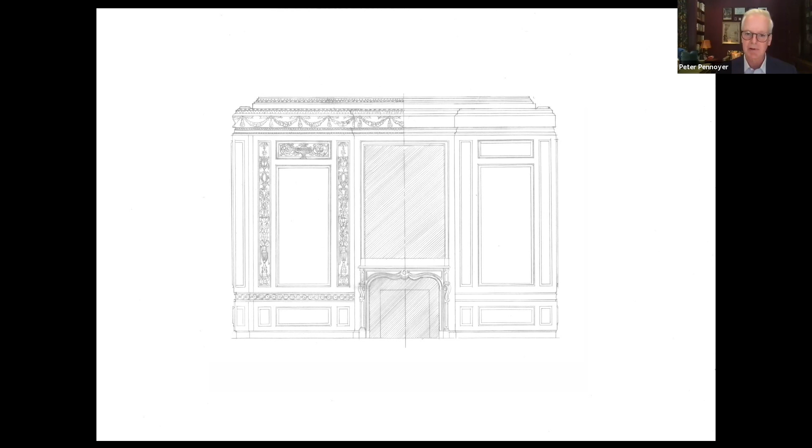These are examples of our drawings. These happen to be done by a wonderful architect named Anton Gleichen. And we go on to the next one.

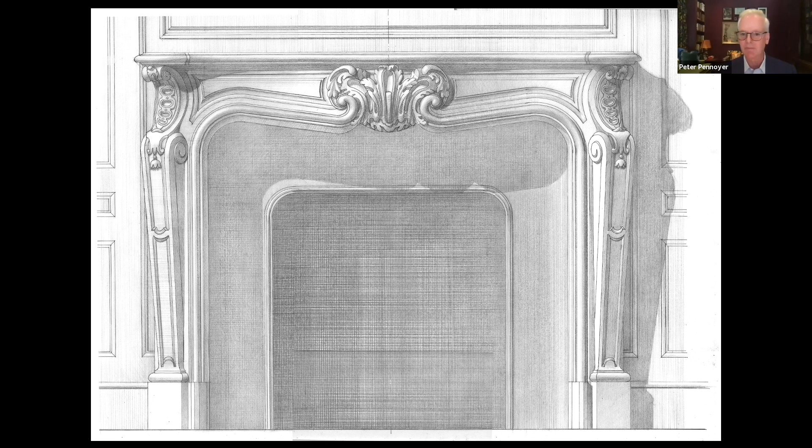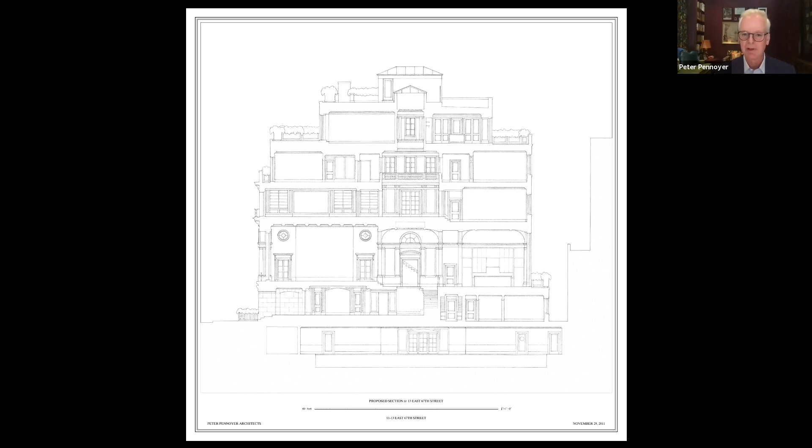So here is an example of a drawing that I still feel probably couldn't be done as well in the virtual world - Phil and Colin may disagree with me - but this is a mantelpiece in a new house that we designed recently. An example of a section through a townhouse, which is a hand drawing that's then mounted and formatted so it becomes part of a digital presentation, but it's a hand drawing, and it's a huge drawing - 42 inches tall, with great detail, just terrific detail with pen and ink.

So I want to thank Colin and Phil, who are wonderful team members of our office. And also I want to say, and you'll see a slide at the end, that all of these projects involve many other people in our firm, and we added a slide that lists them all.

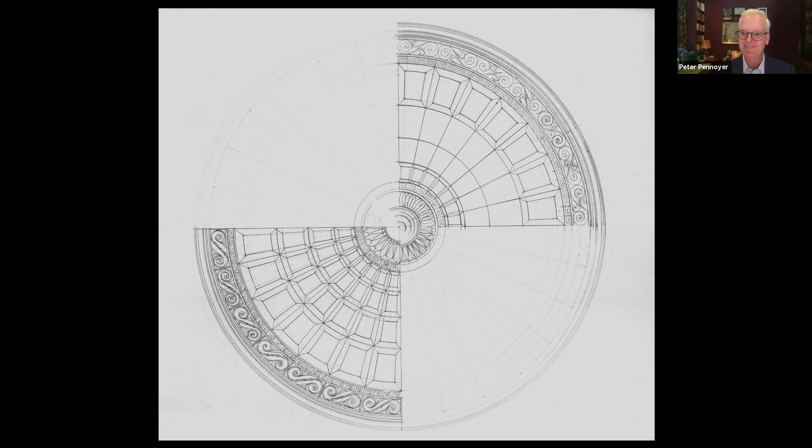Take it away. Okay, so at PPA, we have 2 primary workflows. One is based in CAD and the other in BIM. We decide which one to use for each project depending on that project's specific needs and which team members are available to work on that project at the time. If we're working in CAD, the project teams will develop a full set of 2-dimensional drawings which serve as the foundational documents for that project.

Any 3D models or other supplementary materials needed for the project are developed in parallel using those 2D drawings as a reference. If the design changes at any point after those 3D models are already underway, those changes have to be manually coordinated between the 2D and 3D teams.

Likewise, any changes made directly to the 3D models while it's under review have to be communicated back to the CAD team. Typically, once a project receives final design approval from the client, it proceeds in 2D only from that point forward.

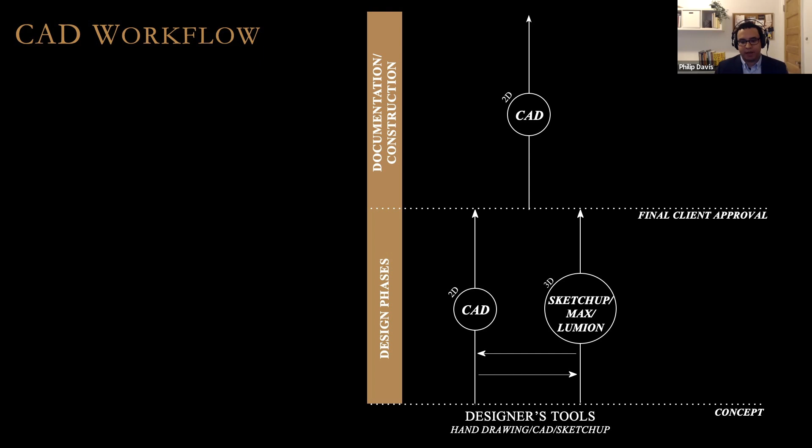The art selection here had the potential to really meaningfully impact the design, as different pieces want to be shown against different materials, and some of the pieces had structural or size and clearance requirements in order to be moved or displayed properly. So because of that, we identified this space as a good candidate for digital rendering.

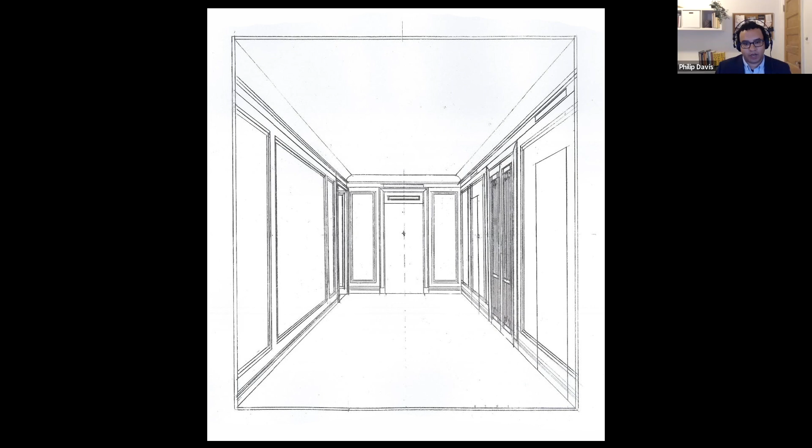That would allow us to create presentation materials that included the art and could be understood immediately, which would help the client explore options and make informed decisions.

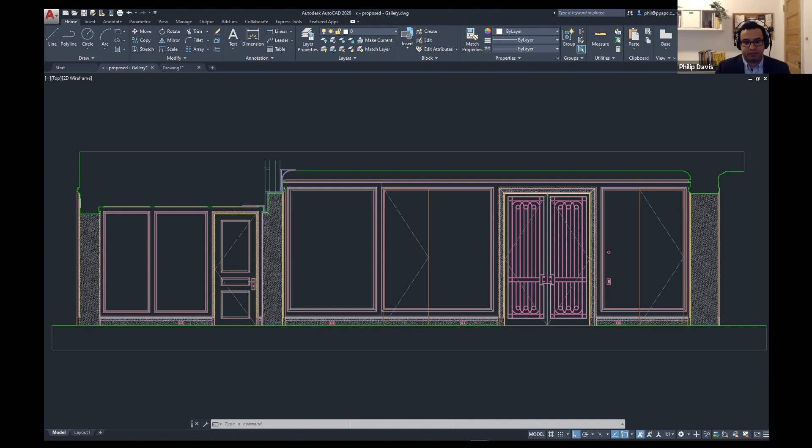So working from the designer's sketches, the project team produced a set of 2D CAD drawings like this interior elevation. These drawings served as the primary documentation of the project. They were used to create presentation drawings, construction documents, and they were also handed over to the 3D modeling team and used to create a 3D digital model of the space.

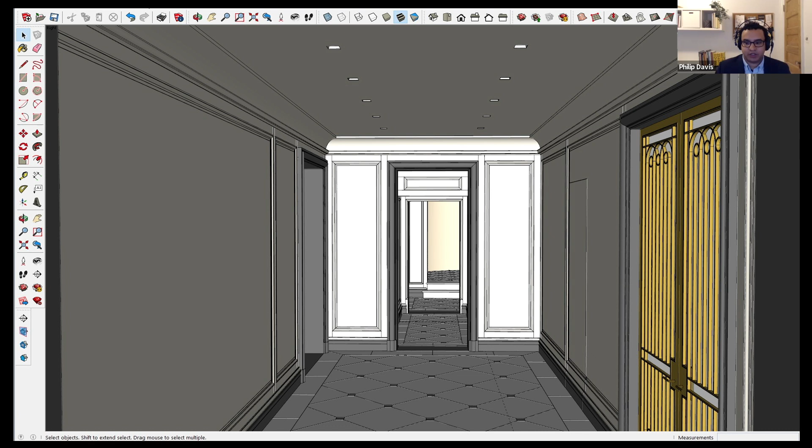However, you will notice that the stair at the end of the axis is missing entirely, and that's because it was built in a separate piece of software called Rhino 3D. Rhino is much better at dealing with geometry that has complex curvature, so the repeating pattern in a handrail that follows an elliptical spiral stair was a much better fit for Rhino's strengths than SketchUp.

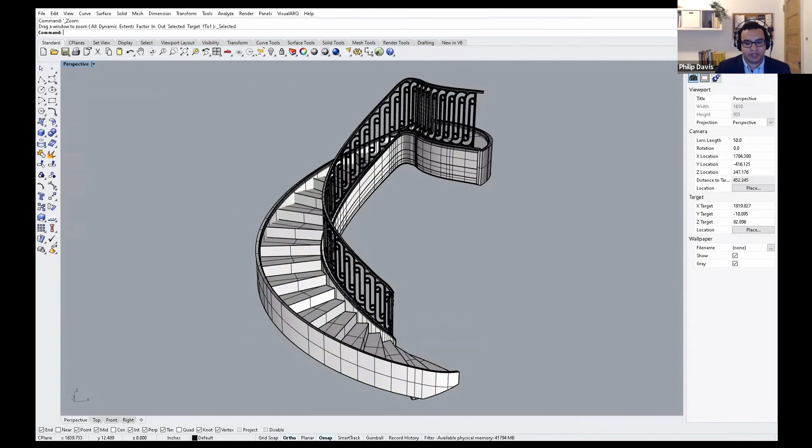We then move into a piece of software called 3D Studio Max, where we bring together and merge the geometry coming from SketchUp and Rhino. We then introduce lighting information and apply textures and materials to the surfaces of the model. And crucially, this is also where we start to incorporate the art into the space.

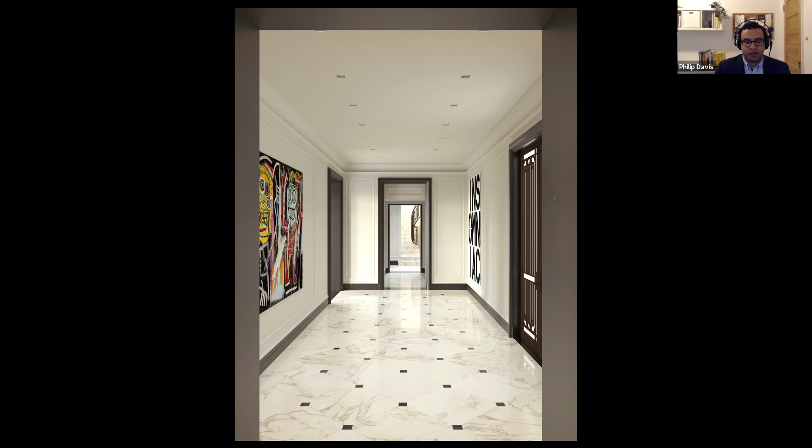And using this software, we're able to produce digital renderings like this one that we present to the client. And these images help the client decide which pieces of art to display where and choose the materials that will help the art look its best.

And those are the kinds of decisions that, if you leave them unmade, have the potential to really introduce a lot of delay into a project. And that's especially true if the client makes a decision, but then loses confidence later on in the project and wants to go back and make changes to things.

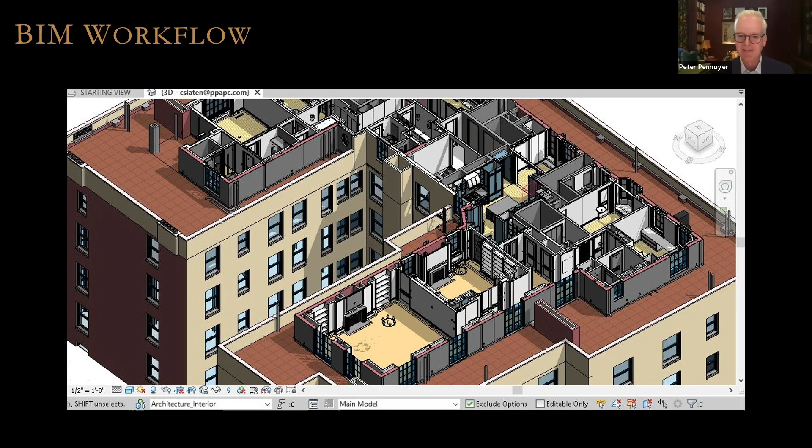Thanks, Phil. The second and most recent workflow adopted by PPA is the BIM workflow. You could teach an entire semester on BIM and how to use the various BIM tools, so I'm simply going to give a few bullet points for those who aren't familiar.

BIM stands for Building Information Modeling. One of the most widely adopted software for BIM is Autodesk Revit, which is often referred to interchangeably with BIM. Instead of creating 2D line drawings like you would with CAD, with BIM, you are building a 3D model of the building as if you were constructing it in real life.

This 3D model serves as the basis for all of your documentation. Drawings like floor plans and elevations become views of a single model. This means that as changes are made, all of the drawings or views are automatically updated simultaneously.

In the background, a BIM model is essentially a visualized database. All the elements within the model carry information, and this information can be organized into schedules that are also automatically updated as the project progresses and can even be used to manipulate the geometry.

Because one file is the source of all the information, Revit has the capability for multiple team members to be working on the same model at the same time. In some cases, these teams can get quite large.

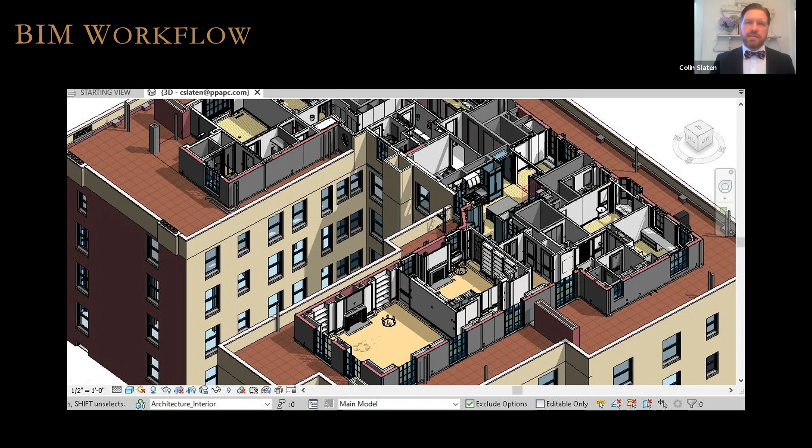Additionally, BIM also provides the added benefit of being able to coordinate three-dimensionally with consultants and run various analyses like lighting or energy, among many other things.

Here on the left, we're demonstrating a successful route for a chimney flue from the fireplace to the chimney through structural, mechanical, and architectural obstacles. On the right is a live coordination view of a reflected ceiling plan. We use these as a quick visual check to see if ductwork is poking through the ceiling. The bright green ducts clue us into areas that require more attention.

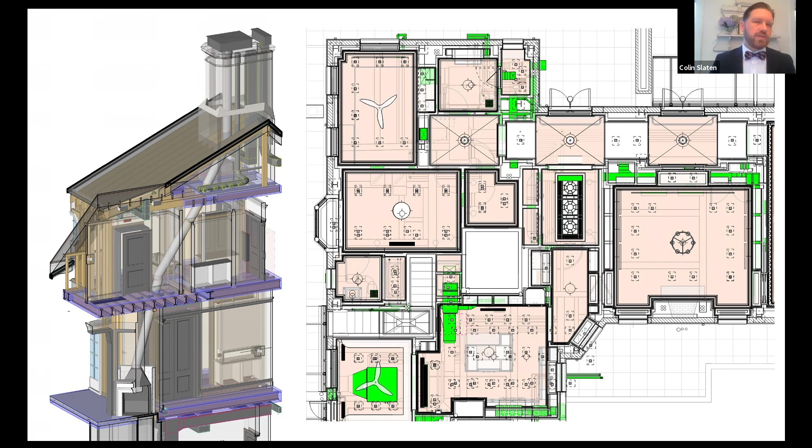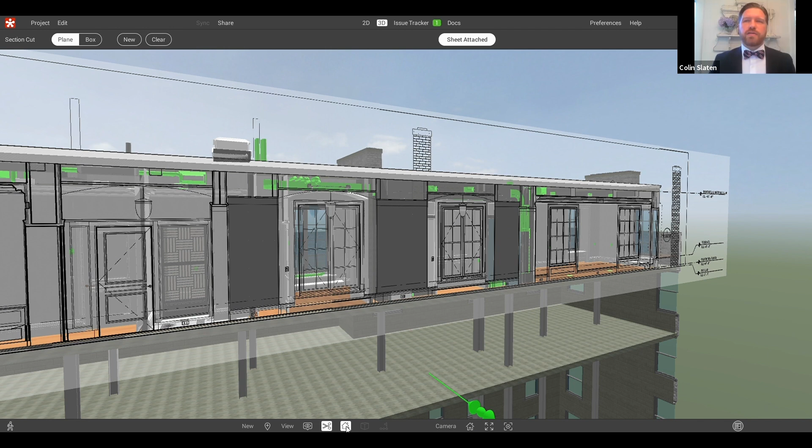Recently, we've introduced an additional program called Revizto, which allows project team members as well as non-Revit users to see the latest drawings and models auto-updated daily from the live Revit model. This allows for easy review of architectural as well as consultant models and has a robust issue tracking system for communicating and task listing. The 2D drawings can be overlaid on the 3D model for quick contextual reference.

So why BIM? Among all the reasons I previously mentioned, one of the more interesting and important ones to PPA is the convergence of 2D and 3D efforts that you saw in the CAD workflow. Because the BIM model is the source for all the drawings and 3D information, when we go to render for a client presentation, all we need to do is export the model. There may be some cleanup, but that work usually turns out to be necessary regardless.

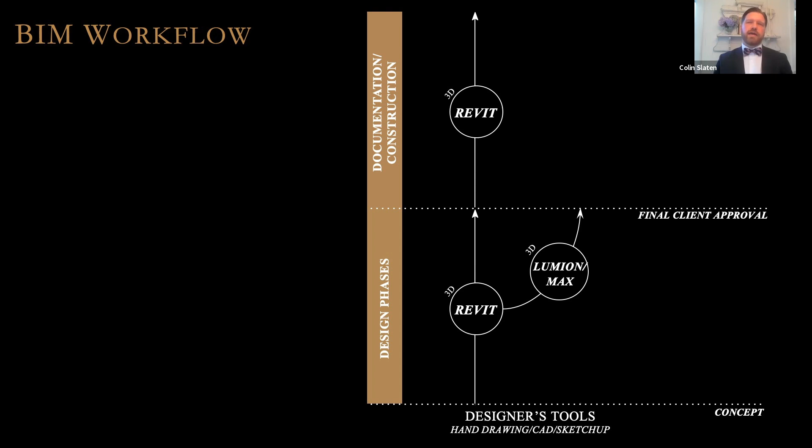Where previously two teams had to keep things coordinated and up to date between the CAD drawings and a separate 3D model, now all of this happens automatically, significantly reducing redundancy. You can see in the diagram how the BIM model starts at concept and carries on through the life of the project, while other ancillary efforts like client presentation and construction documentation branch off of it.

A lot of what PPA does is related to renovation projects. So as an example of BIM, I'm going to start at the very beginning with a survey model. In recent years, we have been hiring surveyors to provide point cloud scans and then create Revit models of the existing conditions for us.

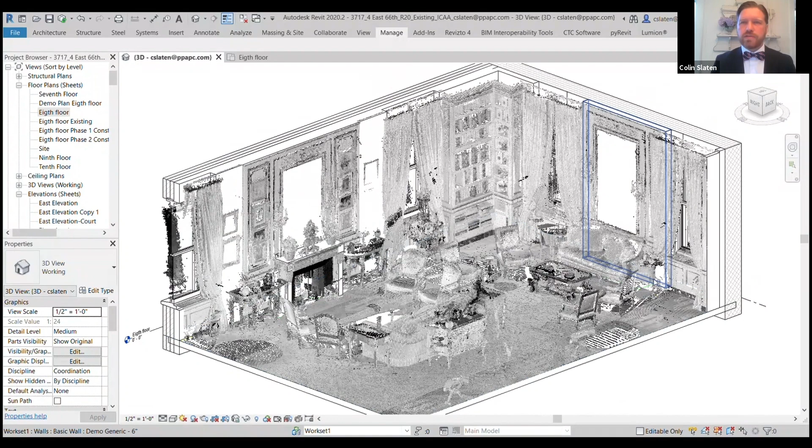So Colin, could I just ask, so just to be clear, this is an image made of dots, which are all the data points. It almost looks like a photograph, but it's a collection of data points from the laser. Is that right? Correct, and it's a three-dimensional image.

So the scanner basically scans the entire room and reports back points when it hits solid surfaces, and that's where you get the point cloud from. It's just a bunch of points. It takes multiple scans in different rooms in order to achieve a full picture of the space.

The surveyor will create a Revit model based on that point cloud information as part of their deliverable. Beyond that, we can actually overlay this point cloud onto our architectural Revit model to verify things against the existing conditions. In the case of this scan, we were under time constraints to get the survey model started, and the previous tenant hadn't moved out yet.

As you can see, the scan captures everything. Ideally, we would start with an empty apartment, but the surveyor was able to construct the model from it. You can see the blue highlighted object there is a window that's part of the actual Revit model.

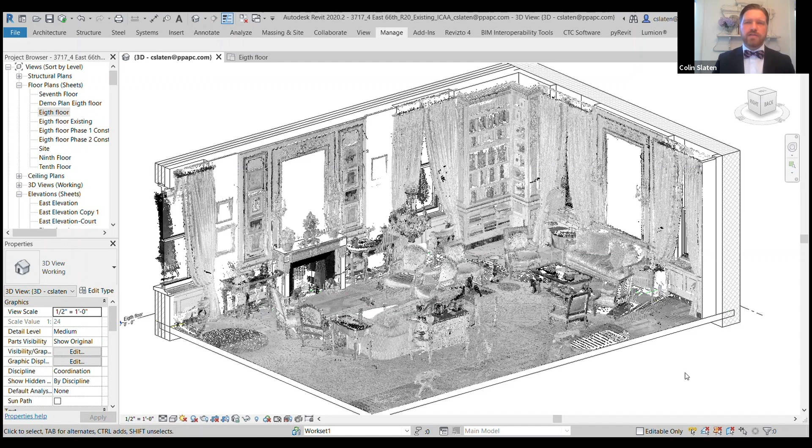In the case of an existing apartment renovation, the team will take the model provided by the surveyor and begin virtually demolishing the interiors based on the design. Because Revit allows for phasing of projects, we can document the demolition directly in the model.

The team is then able to use the surveyor's model and the point cloud to verify important dimensions and feed that information to the designer. Seen here, PPA designer Ryan Hughes created hand drawings of what will eventually be the new library.

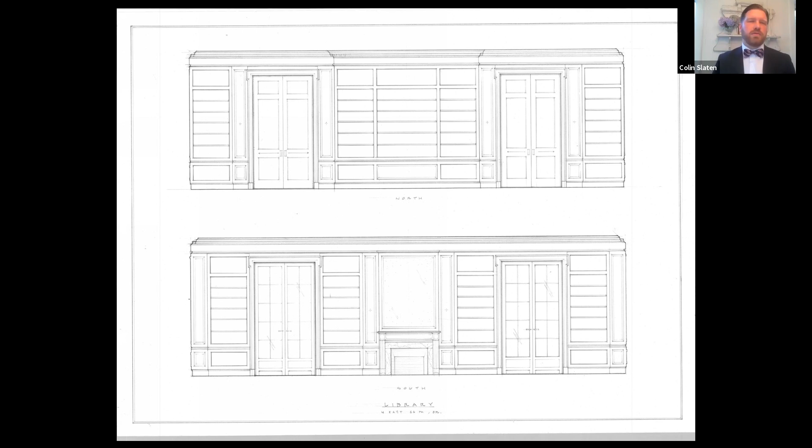Though it's still an ongoing effort at PPA, we are continually trying to find ways to streamline the process of integrating the basic details of a typical classical room into our Revit workflow. We begin with generic models of things like casings, mantles, and window jambs, and try to set up a workflow that allows team members to easily customize these elements to the individual project. This gets us about 85% of the way there, with an additional 15% being set aside for specialty modeling to capture less typical conditions.

In the video, you can see the team has begun using these elements to create a model based on the hand sketches seen in the previous slide. The library is now a fully worked out 3D space.

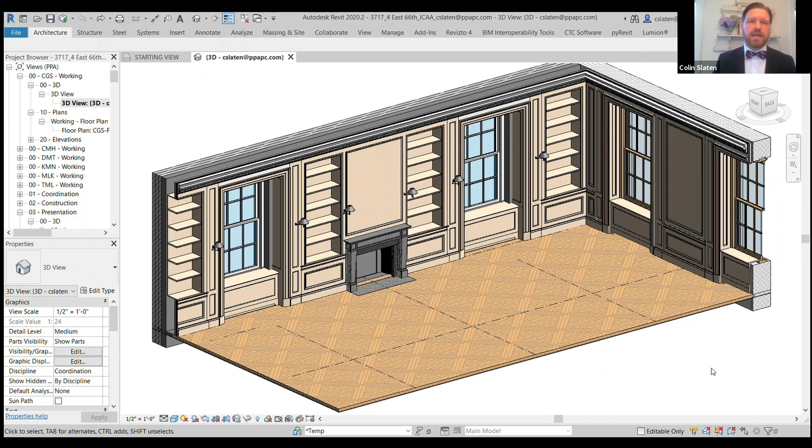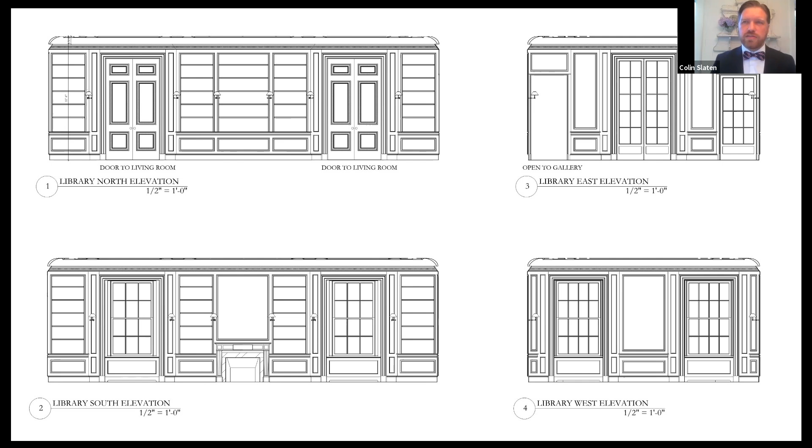And from the same model, the interior elevations. Annotation and dimension will eventually be added to these to create the elevations used for the construction documents. This particular project is on the boards and about to go into the construction document phase. Lastly, a perspective line drawing derived from the same model for use in a client presentation.

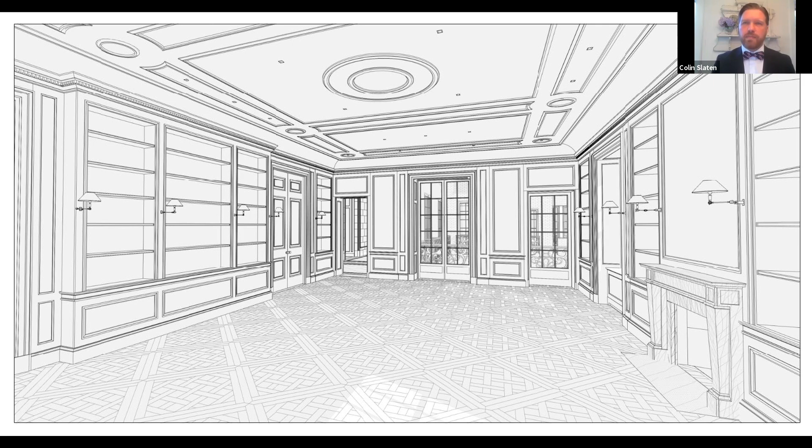In some cases, we choose not to render at all. Instead, we use line drawings like this that are views of a live Revit model. Because all these drawings are simply views of the same model, as detail is added to the model or changes are made to the design, these are all updated automatically. This allows the team to make changes for an upcoming presentation or deadline rapidly.

We sometimes take these early renderings a step further and use a white box render method to demonstrate the feel of the design geometry without getting into the weeds with making definitive material decisions. Lumion is the tool of choice for this, as it can rapidly create quality renders with a very small time commitment and no need for post-processing.

On another project, starting from one of Gregory Gilmartin's hand sketches of an Art Deco corner detail, the project team is given a series of sketch vignettes to measure and develop in Revit. In this case, because this detail repeats in various forms throughout the building, we decided to make this a family that can be placed in multiple locations.

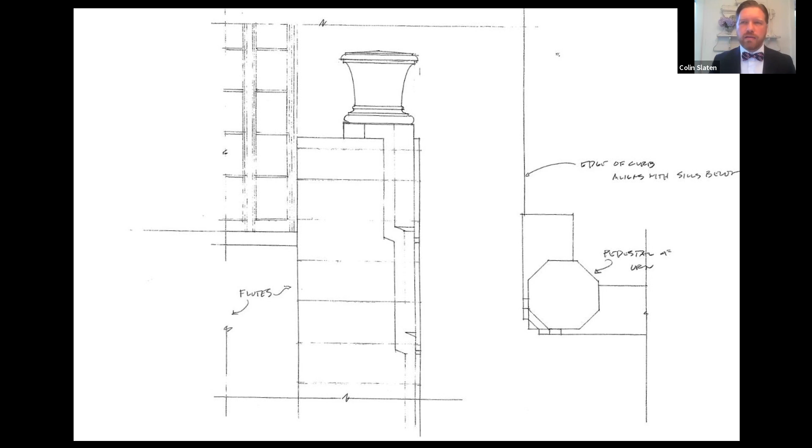A family in Revit is roughly equivalent to a CAD block. The design consists of a corner pedestal with a series of drip edge chamfers, and on top of the pedestal sits an ornament. In order to make this flexible enough to use in multiple locations, parameters were added that allowed team members to essentially pull the chamfer down the side of the building to different levels depending on where it is located.

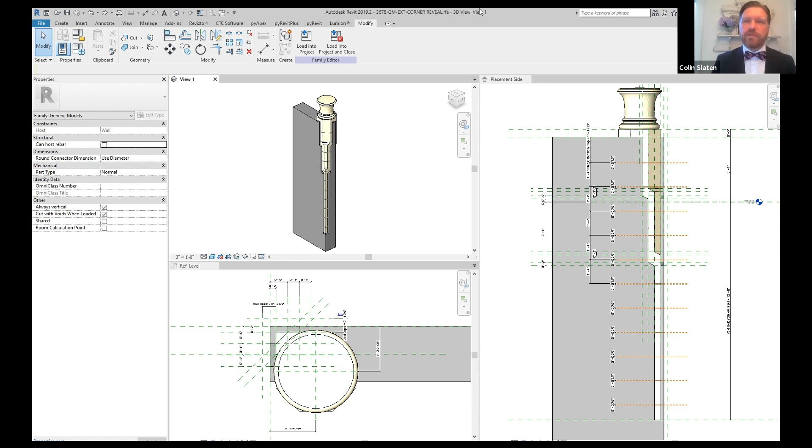And Colin, will this allow the stone production people to mill for using this as a background? How do they integrate that? This would be, they would go off of the construction documents, kind of the traditional way. However, we have the full capability of providing them the model in order to do that. I think in this case it didn't happen, but it is absolutely possible.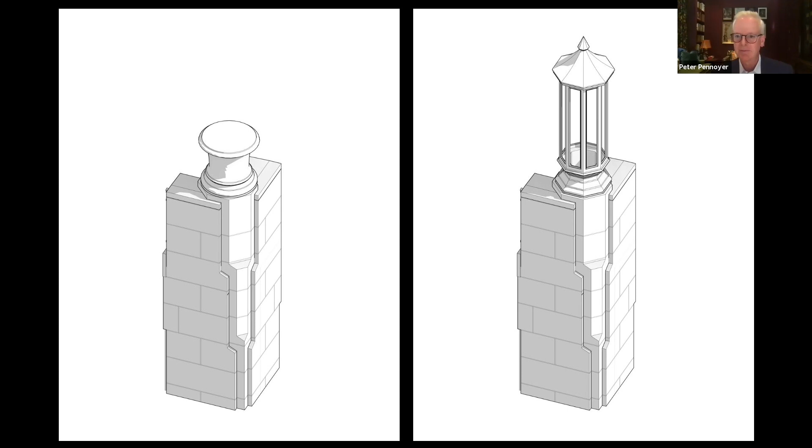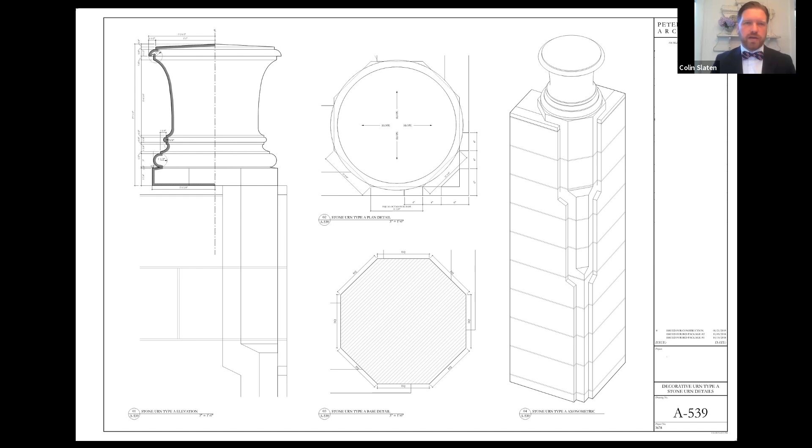And just one more note to give people a sense of scale, the lantern you're looking at there is 78 inches tall. That's true. And another thing we built into this family is the ability to swap out the details, so you have the urn on the left and the lantern on the right just by selecting them out of a list. These two images were taken directly off of the Revit model, and then again the same model was used to create this documentation page, which is what we were talking about a minute ago. This would go to the fabricator in this case.

We also have begun to use Revit to help us organize large estate projects that consist of multiple buildings. This allows us to study different layouts, do sun studies, and organize models. Even if they aren't all native Revit models, they can all be brought into the site and studied together, even if it was coming from SketchUp or another tool.

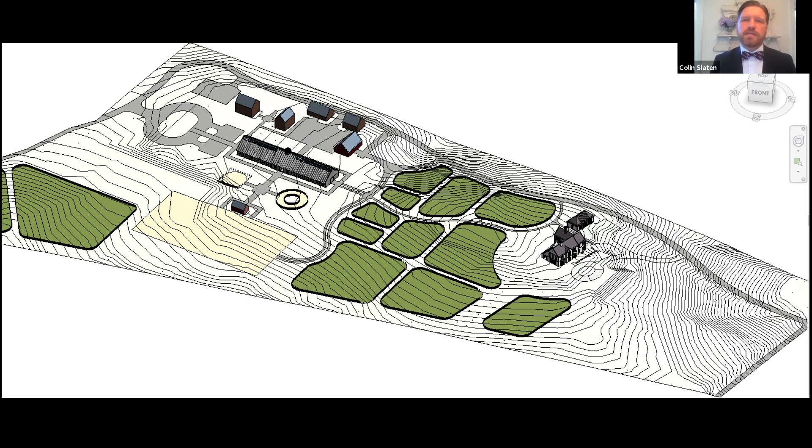This is a horse farm in Kentucky that is currently on the boards. We can then export the entire site into Lumion. We've been developing this hand sketch effect application in Lumion to render exterior projects. Lumion does a really great job of creating realistic looking artistic effects that do not need to be post-processed. It also has a very robust library of plants and trees for convincing exterior renders, which is why it is also widely used by landscape architects.

Once the design and modeling work has been completed, this whole process of creating these renders didn't take more than 20 minutes. So those techniques are sufficient for most situations, but we occasionally find ourselves in need of something a little more specialized. For instance, 3D printing.

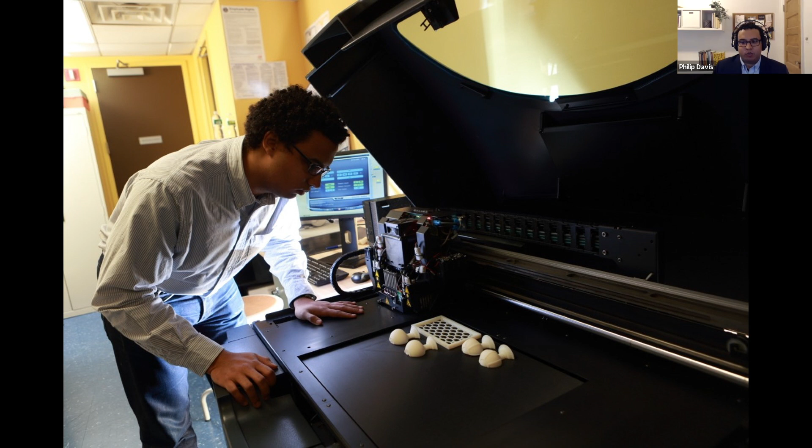We have a 3D printer located in our office. You can see it here being operated by a young man in an ill-fitting shirt. This machine uses polyjet technology, which allows for a much finer surface finish than most other 3D printers can achieve. It also has a very large build envelope, allowing us to print pieces up to 17 inches across in one go.

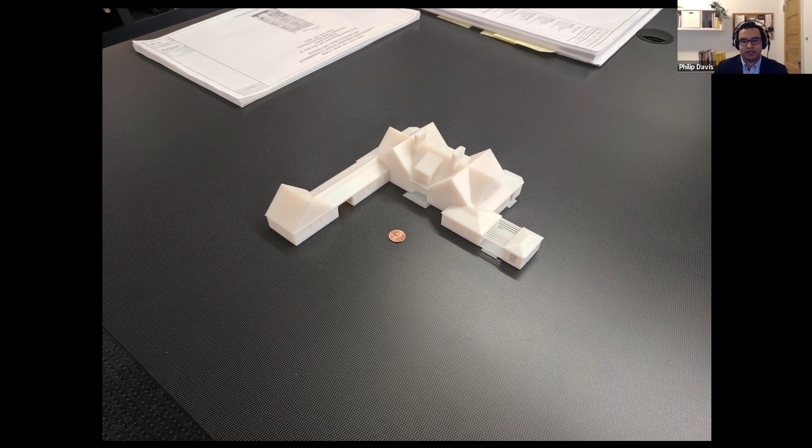Since we've started 3D printing, we've found that most of our models fall into one of three categories. First, there are the small massing models. These are typically produced at 16th inch scale and edited down to contain very little information beyond massing. The openings here are indicated by changes in plane, but nothing beyond that level of detail is communicated. The small size and simplicity of these models makes them very quick to produce and also very easy to iterate on. Building the first version takes time, but subsequent changes can be captured in 3D quickly and a new model printed.

That ease of iteration is one of the main benefits of 3D printing, because the work you did to produce your previous model isn't lost when you start on your next one. For some projects, we've been able to produce and present models like this one on a weekly basis. And just to be clear, that's the limit of the client's schedule, not the machine or our workflow. We could have gone faster than that if we needed to.

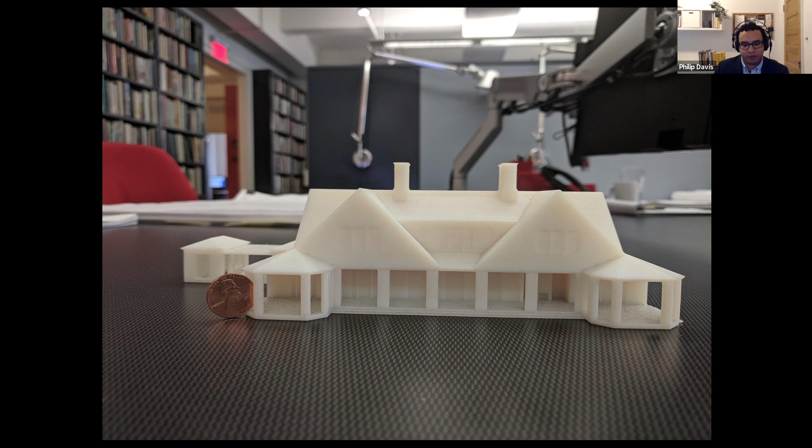On the left, you can see the profile that was handed off by the designer, but a key change has been introduced. Inside this rectangle, some little lines have been added that actually introduce a 1/100th of an inch gap between the knob itself and the rosette surrounding it. These profiles are then used to create a digital 3D model, shown on the right. Then those 3D models are sent to the printer and printed together as one print.

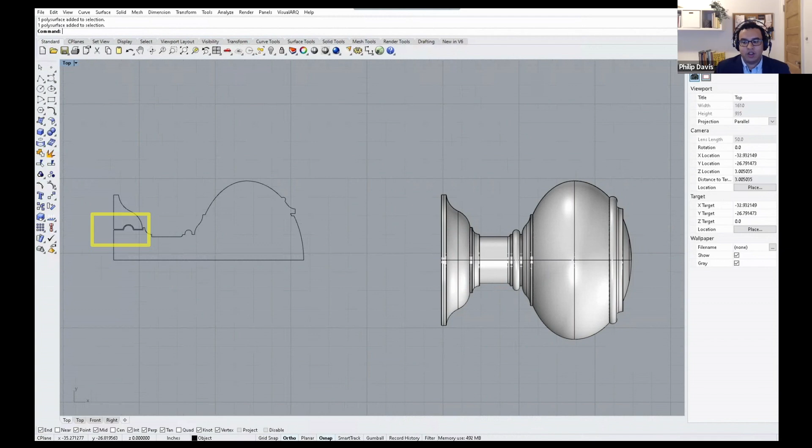After the cleaning process, that small gap we introduced between the knob and the rosette allows the knob to turn freely if you hold the rosette in your hand. As simple as it may sound, the ability to turn the knob in your hand when you're holding it really helps you evaluate the design.

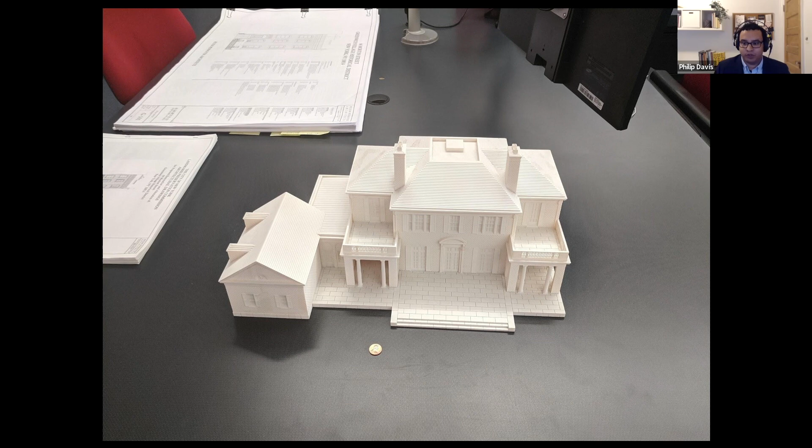We also produce large, highly detailed models for display. Here's a model of a house in Long Island that's on display in our office currently, and you can see from the penny that this is a quite large model. It had to be printed in multiple pieces and then assembled afterward to achieve this size. If you look closer, you can see it's also very information dense. There's a brick texture on the wall, the shutters have texture, all the molding profiles are included, even the downspouts are indicated. It really tells you a lot about the design of this home.

This model, which you might recognize, of a Czech cubist house in Ohio, falls into this display model category. So let's talk briefly about how a model like this might be made. SketchUp, we found, is extremely well suited for 3D printing work.

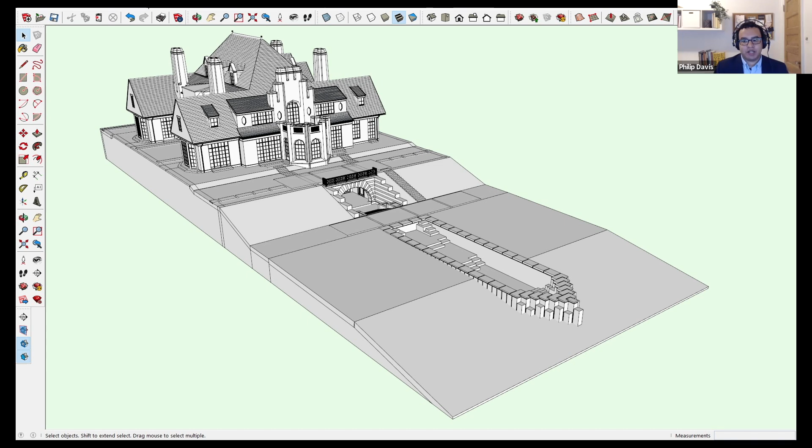This is the SketchUp model we used to produce the model you just saw. The most important thing to note is that this SketchUp model is purpose-built for 3D printing. We made other 3D models for other purposes for this project, but we can't use them interchangeably, because we had to introduce key changes for the benefit of a 3D printed physical model.

If you look closer at this facade, in the areas indicated, there are coplanar changes in material. Since we prefer a monochrome white finish in our display models, we had to indicate this material change in some other way. We did so by introducing grooves that run across the facade, and they had to be drawn 2 inches wide in order to read well at the size of the final model.

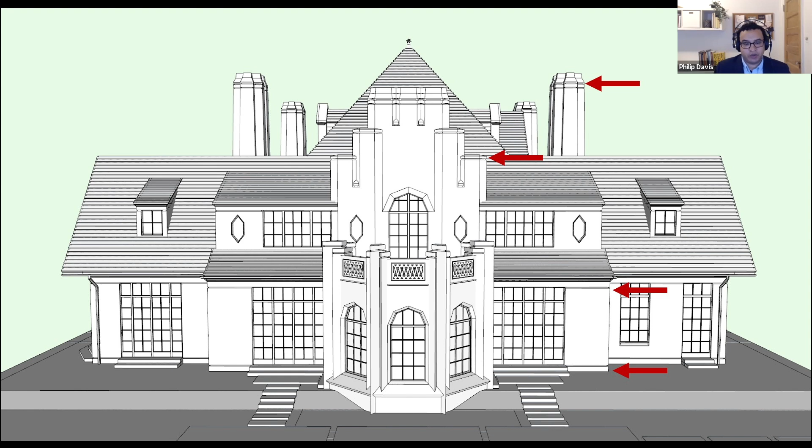Obviously these 2-inch grooves aren't present in the actual design of the real house, but they're necessary here to communicate the actual design intent. You can see those exaggerated details make the model legible at a distance. You can tell there's some articulation in the design at the tops of the chimneys as well as at the base of the house, even though it's all the same color.

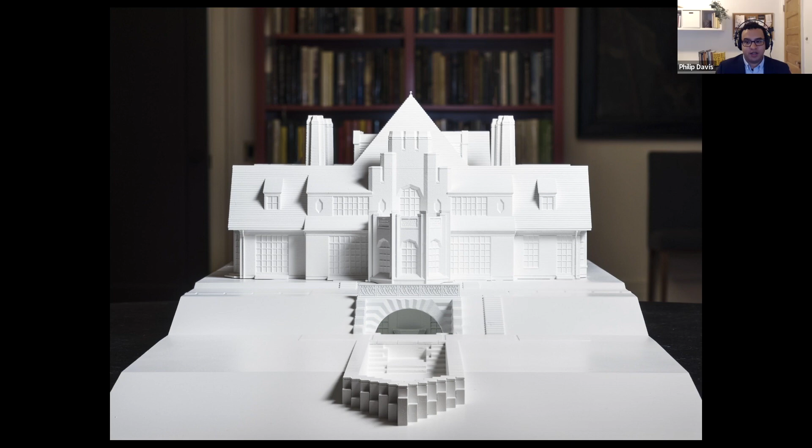We also use digital tools to help inform the designers for specific exercises. During the design of the Czech Cubist house we were just looking at, the main entry was focused on for this. The project team wanted to interpret a linear vertical color gradient over a 3D faceted volume into a 2D unfolded series of polygons, which is a mouthful.

A base model of the space was built in Rhino, then unfolded. You can see in the slide the 3D and unfolded 2D representation of the space. Grasshopper, a visual scripting plugin for Rhino, was used to apply the gradient to the shapes. In the window in the bottom right quadrant, you can see the multiple gradient options in the sliders and the scripts that create the gradients on the shapes.

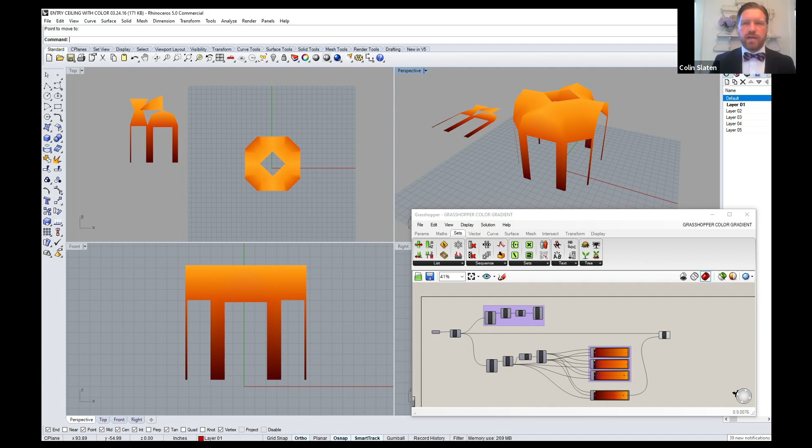The flattened gradient pieces were then printed and given to the designer, Anton Glicken. I also want to point out that this room was inspired by the great banking hall in the building 1 Wall Street, which is Ralph Walker's great Art Deco skyscraper. That banking hall was a work by the artist mosaicist Hildreth Meière.

So if some of you know New York architecture well, you'll recognize the style of this room, but applying it in a space this small was very challenging.

Thanks, Peter. And after the grasshopper script had been applied to those flat pieces, it was then given to the designer, who applied an artistic silver web pattern to it. You can see all the paper models and hand-painted web patterns applied here.

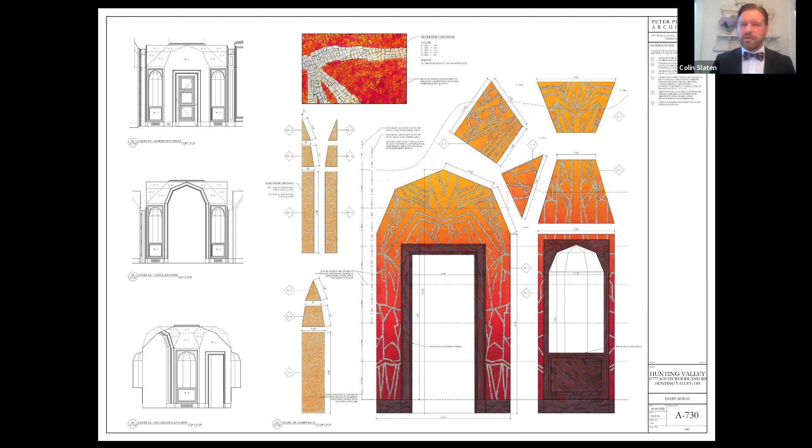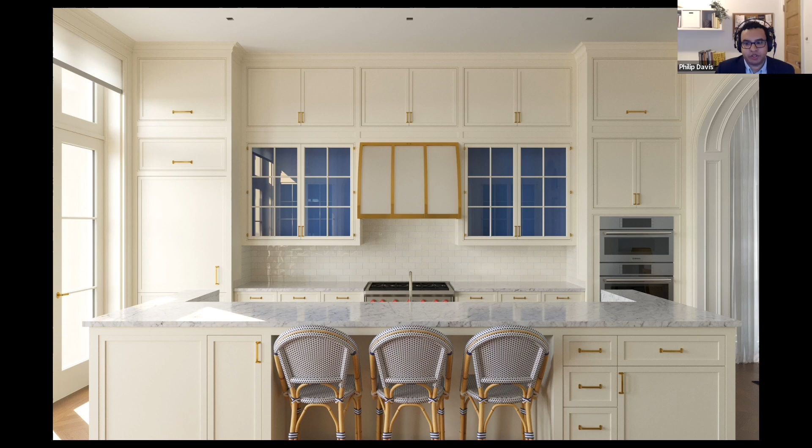We think that bouncing back and forth between the digital and analog is where you can really get some fantastic, intriguing moments. So if we can return to the topic of digital renderings, we find renderings like this one are very useful tools, but they definitely do have some drawbacks.

Namely, they don't leave very much to the imagination. They present small or incidental design details with as much fidelity as the core architectural ideas of the space. For instance, you might present this image intending to discuss the organizing logic of the kitchen storage, but end up spending the bulk of your time talking about how these particular stools are not to the client's taste.

We found that this really helps to convey a sense that decisions are still being made here, and that the thing we're presenting to the client is an idea about the kitchen. We're not dictating to them which stools they must sit in while they eat breakfast.

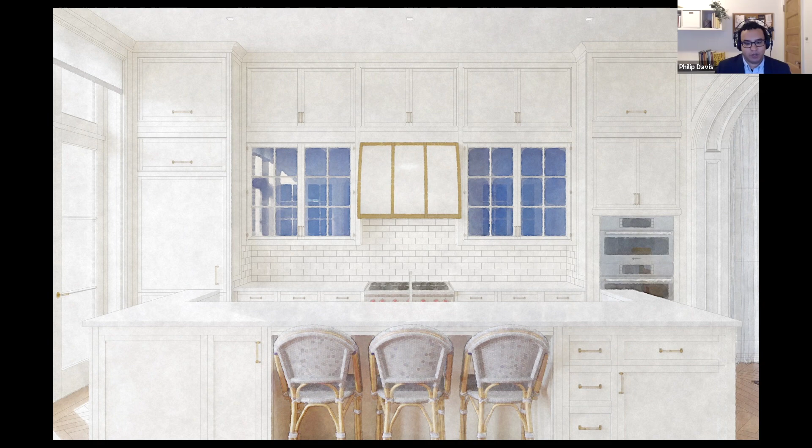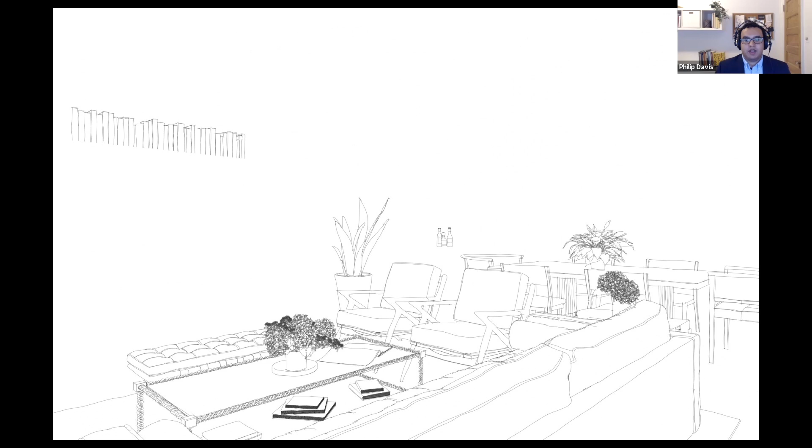So let's talk briefly about how an image like this is produced. It starts with a standard digital rendering. We then use a plugin to 3ds Max that's focused on producing line work to create a line rendering of the architecture that exactly matches the rendered view we've produced. We produce another line drawing that captures the furnishings in the space.

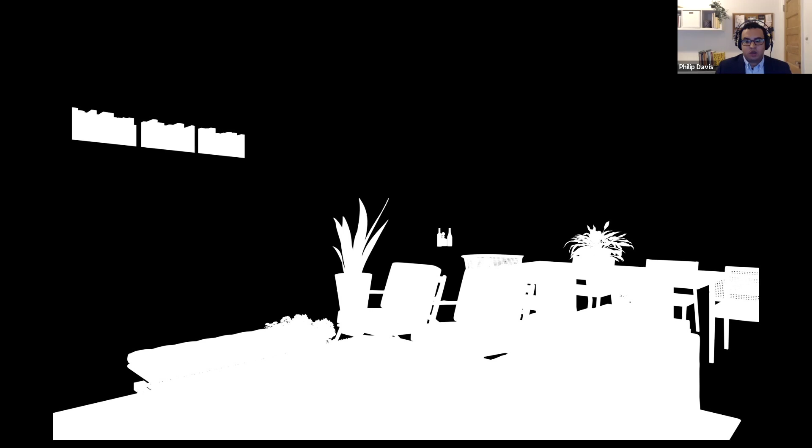Alongside the primary image that our renderer produces, it can also produce specialized images that contain technical information. Each pixel is colored either black or white depending on whether it's part of the architecture or the furnishings. We typically produce a number of these informational images alongside the main rendering, and you can see a few more examples here. These contain information about direct versus indirect lighting, orientation relative to the camera or to 3D space, or which materials are applied to which object.

These sorts of informational images are immensely helpful in post-processing, as they give you pixel by pixel access to the underlying information that drives the rendering.

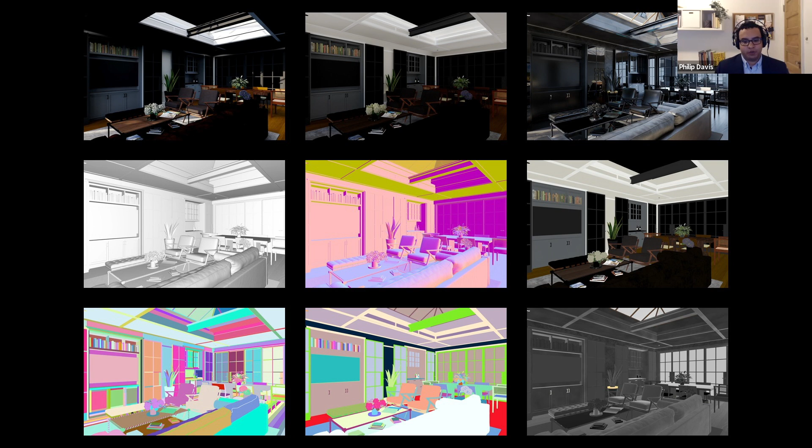There is a lot going on under the hood here in Photoshop. This is a pretty complex process, but it's very repeatable, and it only takes a little more than 10 minutes to go from the raw rendered output to this image. Obviously this isn't a perfect substitute for an actual hand-rendered watercolor rendering, but in situations where we're already producing digital renderings, we found these are pretty quick to produce and they can be very useful in client presentations.

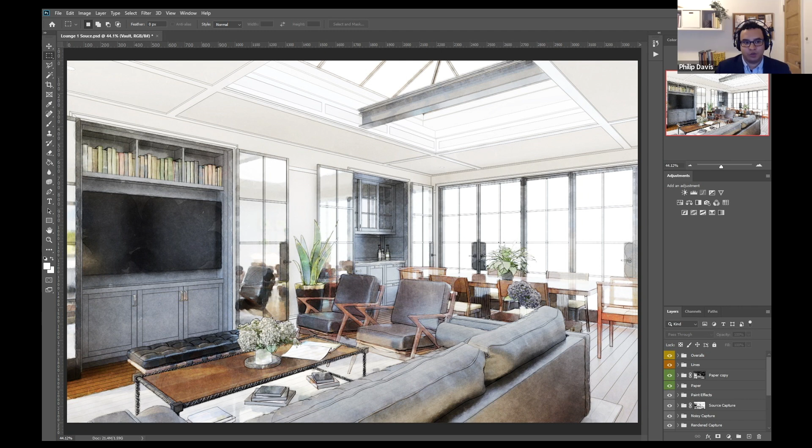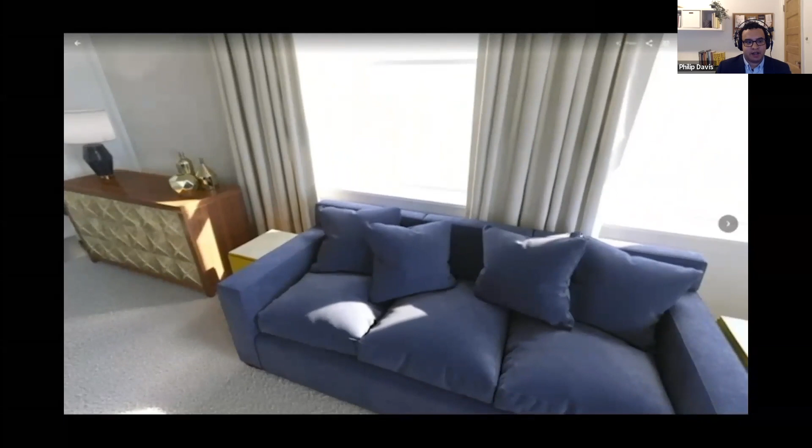Looking forward, recently we have begun finding ways to utilize virtual reality as a way for design review and coordination, as well as client presentation. PPA has attempted this in the past, where it would take a specially built model to render overnight and then be viewed in a clunky VR software. The technology has advanced in recent years, so much so that we can take an as-is Revit model and be walking through it in a matter of minutes.

We've been using Prospect VR as a tool for this, which is focused on meetings within VR projects with multiple people. In this slide, we are reviewing modeling issues as well as mechanical conflicts. The mechanical engineer has also joined us from their office a few blocks away and is walking through the project with us.

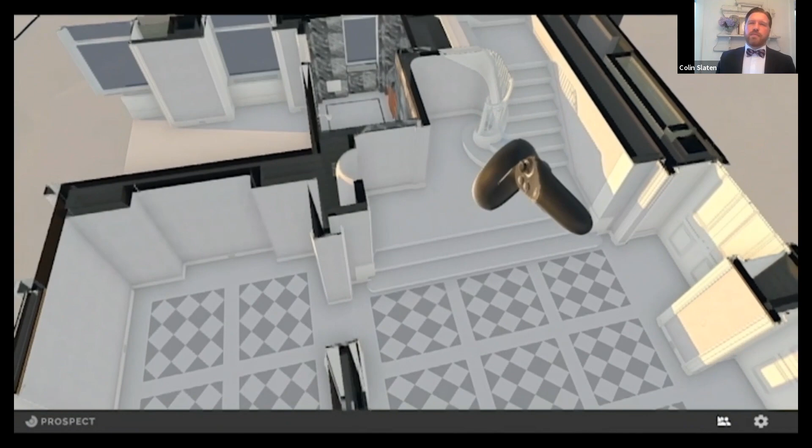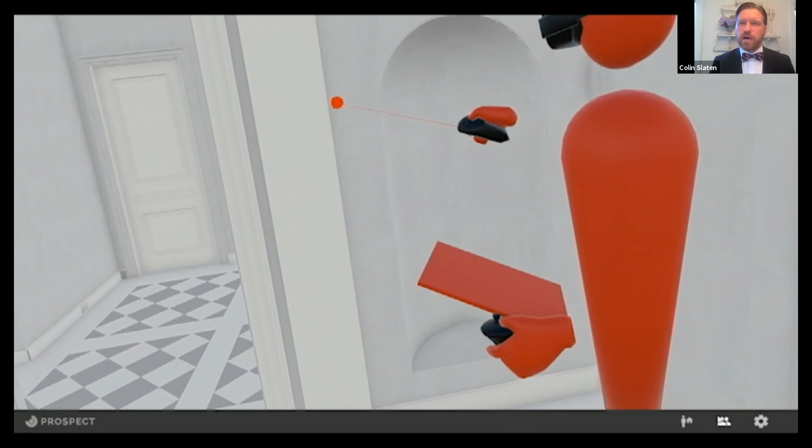Last week, my colleague and I reviewed this stair hall. Both of us were in our living rooms. The dollhouse view you see here in the beginning allows us to view the model as if it was a physical scale model, not unlike one of Phil's 3D prints.

We can then jump in for a more detailed discussion. We can make markups, take photos of those markups, and then those photos actually become meeting minutes for an auto-generated list of tasks after the meeting has taken place.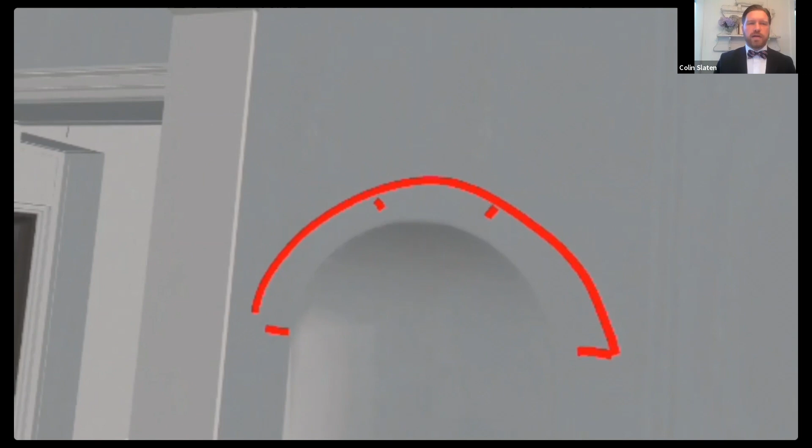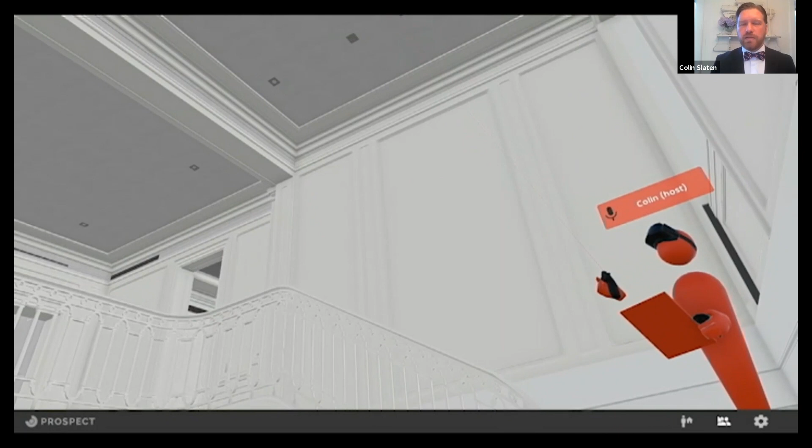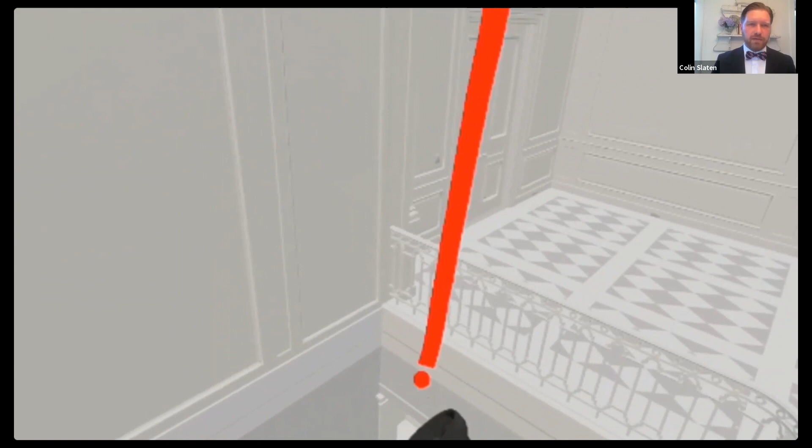The markups can be drawn on walls, ceilings, projected onto surfaces. As you can see here, marking out a place for a chandelier, and then also you can draw three-dimensionally, also seen here being done very badly by myself. A little bit more practice and we'll get the hang of it.

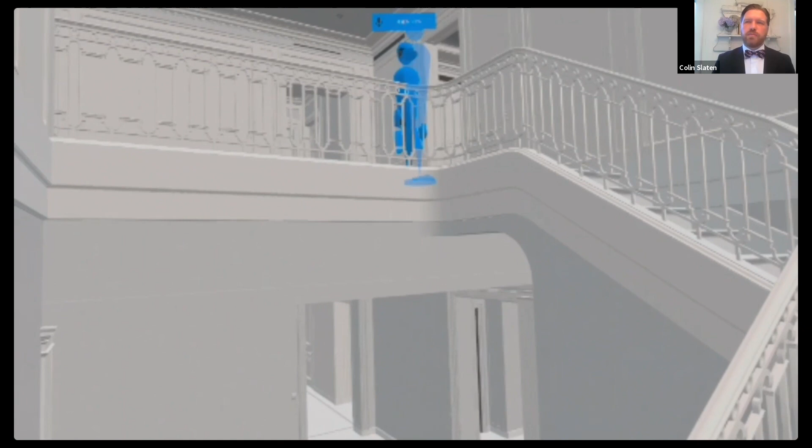At the beginning of the year, we hosted our first client walkthrough in VR. The client was very happy with the design and provided a lot of great feedback to the team while he inspected his future home. Another use for this technology is the ability for designers who may not have full access to 3D tools to stand in their design and review it with the team. We've just begun exploring the possibilities of VR meetings and hope to take full advantage of it in the future.